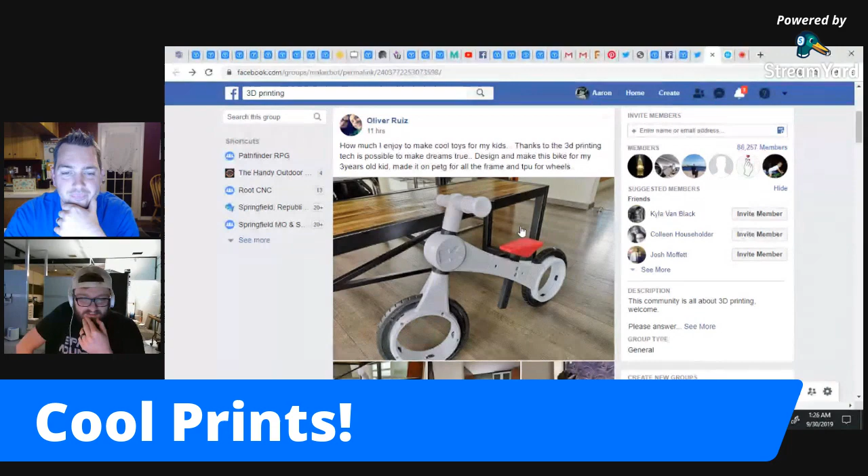Was this made on a desktop 3D printer? Well, here's all it says, but it doesn't say what. That's, and I only saved it because I saw that. I mean, it looks really cool. I just worry, like, are those joints in between the 3D printed pieces going to be strong enough?

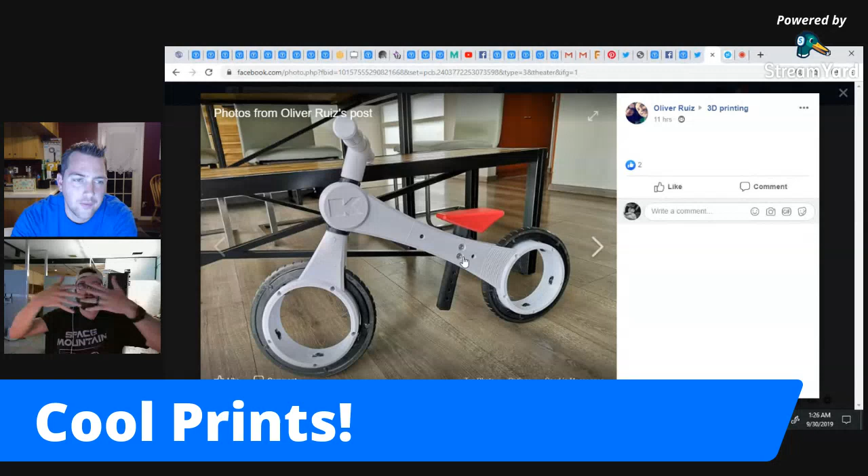Well, if you look at it, this could have been printed on probably a CR10 with the wheel size, is my guess. So this is probably one good sized piece going through. He's probably got this part going into here and bolted into it, which is what I would have done. I would have had it have that interlocking part on the sides, and then so you can bolt it, have it go through.

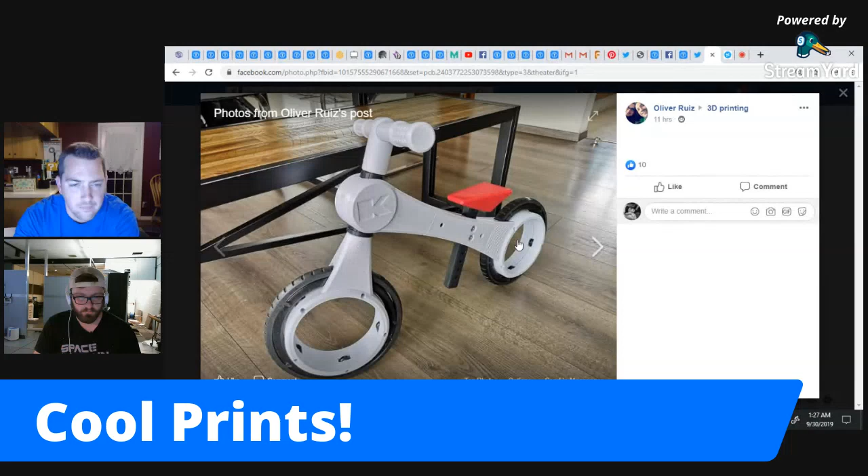I wonder, if I were to do it, I would probably run a threaded rod through the middle of it. Yeah, but the only problem is adjusting the seat part itself. Well, if you ran two threaded rods, one on either side... that's really cool though. Yeah, that's pretty cool. So I thought you'd like that.

Here's one more. So this goes into your robotics. Are you ready for it? 3D printed robotic cat.

I don't know if you know this about me, Aaron, but I hate cats. But you can change it to a dog.

But it's a 3D printed pet. Is it programmable? Does it do something interesting? I didn't have a whole lot of time to actually look at it because today was my son's birthday, so I didn't do a whole lot of looking at everything. But I think you're supposed to be able to program it.

So it's just kind of a robotics platform, but you just 3D print all the parts out. You use Arduinos and just get all the circuitry for it and kind of go at it.

Now I'm not sure if it's open source for everyone to use, like changing the program and everything, but it does say open source. So that's usually what that means.

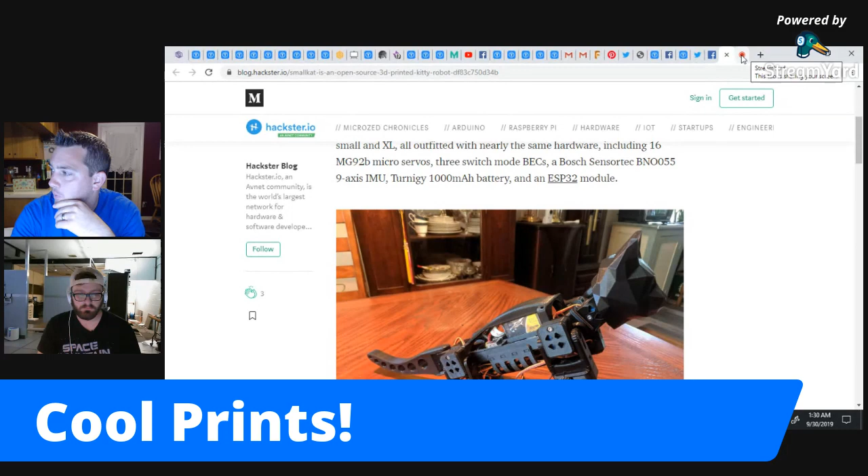Nice. Well, all right. That's cool. Oh, you undid that yourself. Okay, nice. Well, my turn, I guess.

So I just want to talk about some cool stuff that I've been printing over this last week. Some of you maybe spotted it in the background here. I actually made a lamp. I thought it was pretty cool. I printed it in pieces, in a green PETG that was actually donated to me.

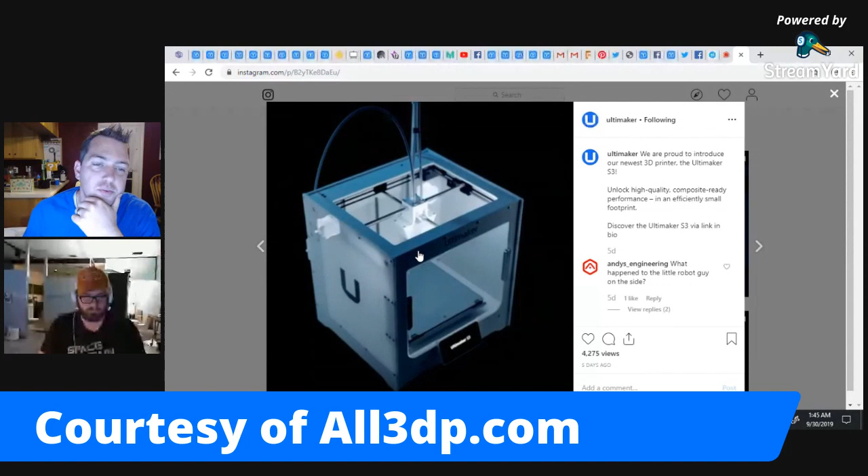So this is the new printer, the S3, the new one they're launching. They're just launching the S3, but they're also introducing attachments for the S5.

That first video you showed, it looked like all 6 filament spools were loaded up. Yeah, all 6 were completely loaded up. Are there rollers in there inside that cabinet? I want to say yes.

So yeah, that was our coming soon. Yeah, but I watched it and they talked about it actually, which was really cool.

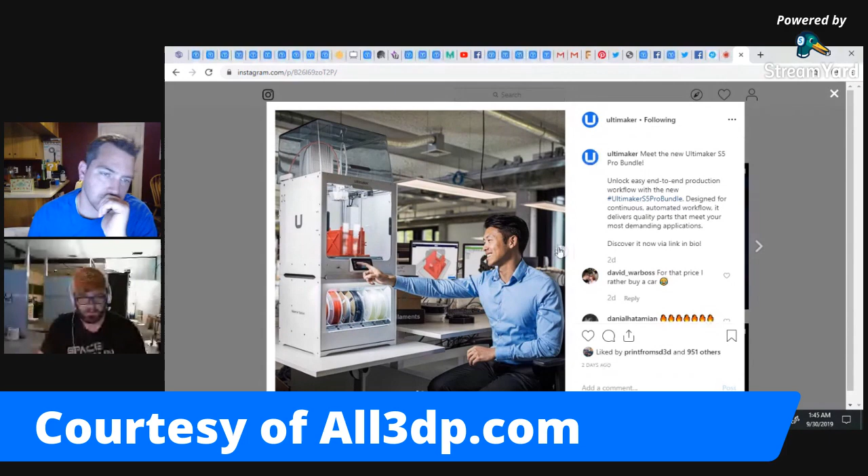So yeah, you got all 6 in here. They kind of feed in the front part right there. And let's go over it. I'll pause it on the spot.

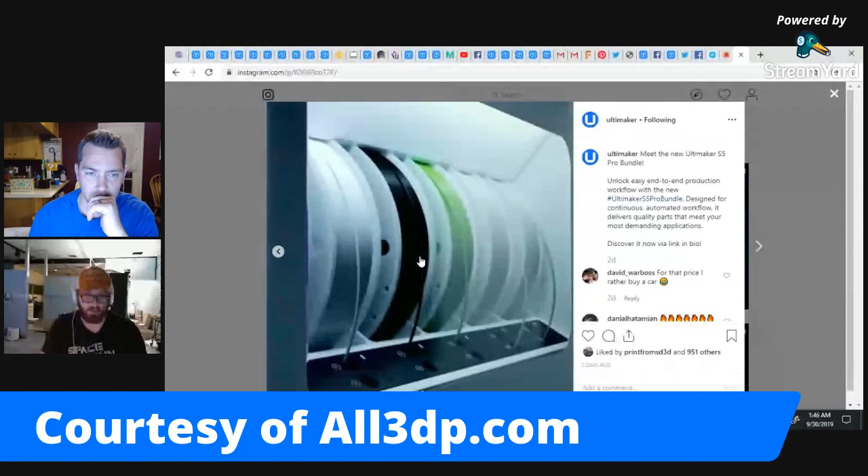Yeah, so it's your Pro bundle. See right there, it looks like they're all loaded up. Yeah, so they are all loaded up. And the interesting thing is, look, there's 2 spots for it to go in.

Yeah, so some are in the very front, but some are in the very back. Why? What's the difference? This is 1, 2. I was going to say that's 3 and 4 then.

So 10, you got 10 holes. I'm guessing it's numbered 1 through 10. But why? Are they gonna have... are you gonna be able to load 10?

Or does this look like it's a rendered visual thing? Like it's not real. This is pretty much just rendered, yeah.

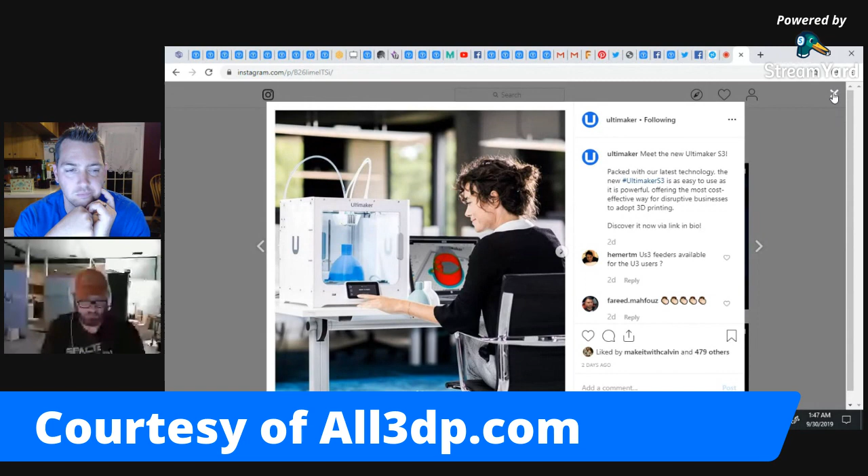But it should feed it in and up and out. So if it's doing what they say it should do, it'll take it and just feed it back into your nozzles through your Bowden system. That's pretty cool, man.

I mean, it's nice, it's way out of my price range, but it's real nice. Yeah, me too. So that was the first one that I kind of saw. I really thought that was pretty cool. And then let's see what else.

There's some new materials coming out. This company, 3D Systems, makes 3D printed materials, and they claim they have similar characteristics to injection molded plastics.

So getting injection molded piece characteristics essentially out of FDM 3D printers. That's kind of cool.

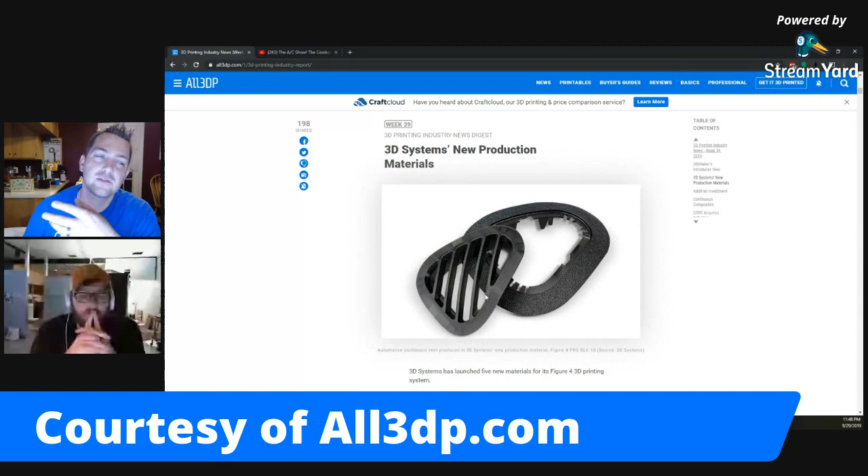They print at a decent temperature, like 300 C. So you can't have your basic desktop printer print this, but 300 C is a lot less than others like PEEK and stuff that print at like 500.

So Cozmic Dumpster asked, what computer to use for streaming? His computer is fine, but when he tries to stream, it sucks.

Yeah, so I use an old laptop, mine's 7, 8 years old. Being used on your bandwidth is one thing, so if people are watching constant videos or something's being downloaded or uploaded, that will hinder your quality.

Also your output of your video. So if you're going to be streaming something, don't do it at 1080 or 4K, do it at like 720. That's a big thing that's going to help you out right there.

Yeah, that's good, and I actually have a pretty decent computer, I custom built a PC, but honestly, one of the really cool things is having a decent webcam, but then also using StreamYard.

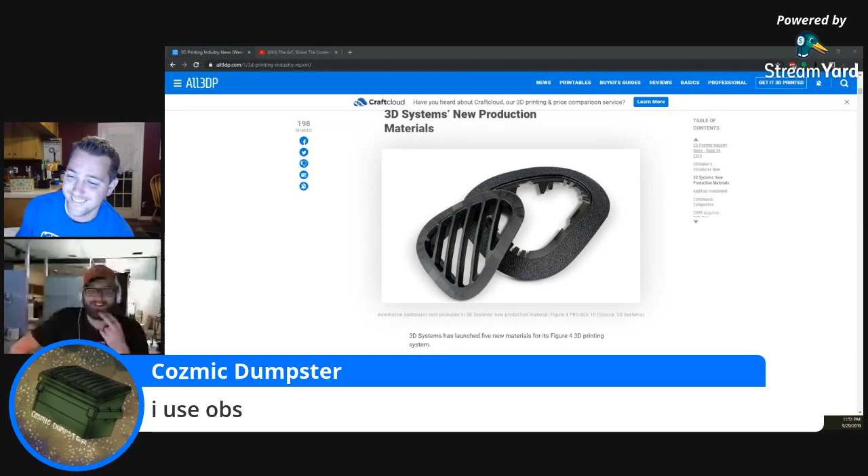It might almost be better if we downgraded the quality. Mine might be going grainy because I selected 720 on mine - I was just like, oh sure, 720. I think it's always set at 480 by default. So yeah, you don't go higher than 720 if you're live streaming - just keep it low quality.

Your webcam helps too. My webcam is a pretty good one - I actually got it on sale for $15 on Amazon, originally a $50 webcam. You can get good deals. $50 is actually a decent price for this cam, just for the audio quality it puts out and its video quality. The one thing I like about it is it does not autofocus - I hate autofocus cameras. So when I do this, it's not going to focus; I have to manually twist it. My camera autofocuses and I love it, but that's one thing I like about mine.

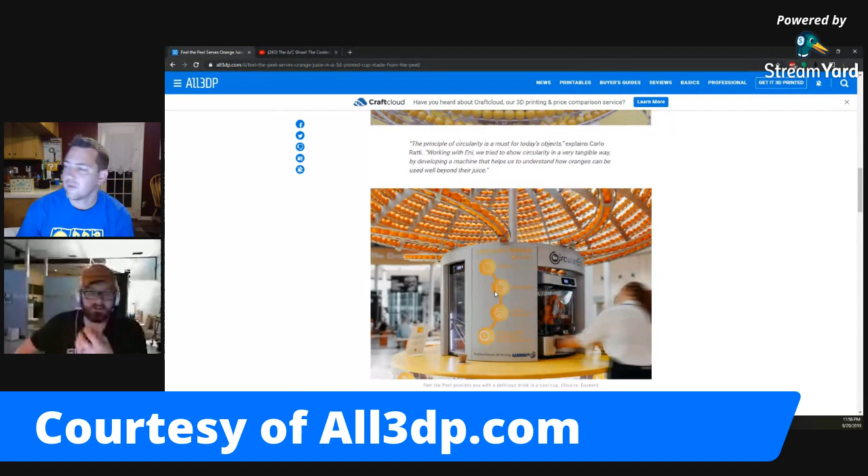If you form it, you put it into pulp, then compress it into a mold form, dry it out like that, and it should stay fine.

So nothing to truly use like an adhesive glue for it. That's what I'm trying to get to.

It says that it's a bioplastic that they make out of the rind, and it has a 3D printer in the center of the machine where when you order your orange juice, you watch the cup be made right in front of your eyes.

I wonder how long that takes. It says half an hour to print the cup. I can see that, the cup's got to be like 50, 70 millimeters tall from the picture.

But they're worried about the material they use, the process isn't considered food safe because 3D printers really aren't considered to make food grade materials.

But it's a cool idea. There's a picture of what it looks like. That's kind of cool, pretty sweet looking. At least if anything, it's beautiful. Oh yeah, it looks cool.

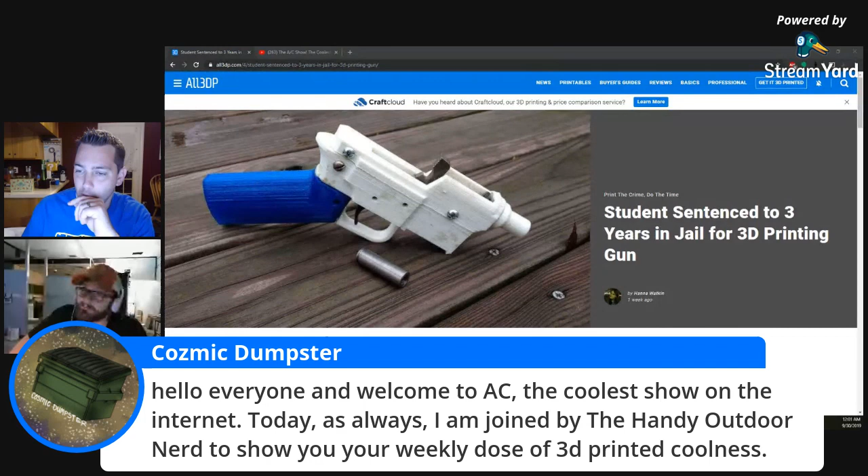So, as we're talking about 3D printed guns, right? Yeah. It's a good thing we're not monetized. Yeah, I don't care, honestly. Like, at this point, I feel like I'm never going to get monetized, so I really just could not care less anymore. Well, and I'm not even close to being up to where I need to be monetized.

Yeah, and I don't care about paying anything really. I mean, if I get 1,000 plus subscribers, I'm okay with that. But I'll work my way up, slowly.

It happens. I don't know how often you go shooting, Aaron, how avid you are. But I own a few guns and I like going shooting, all the time. It's one of my favorite things to do. One of my favorite videos I ever made was about this - I didn't really explain anything, it was just fun to make - but I talked about Newton's first law of motion and how basically we could create bulletproof objects out of stuff you find at the dollar store.

Uh-oh, Aaron is dropping out of the stream for a second, guys. Hopefully he comes back soon. There you go, okay, yeah, we're back. It said problems, and everything was loading, I was like, let's hit refresh.

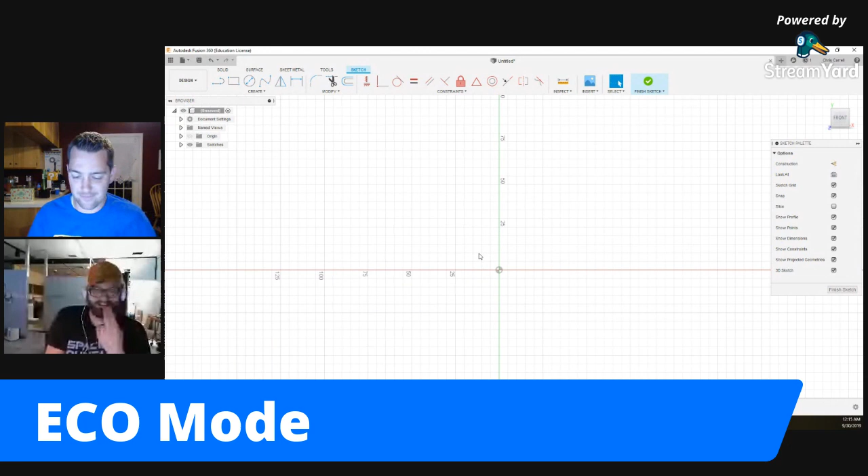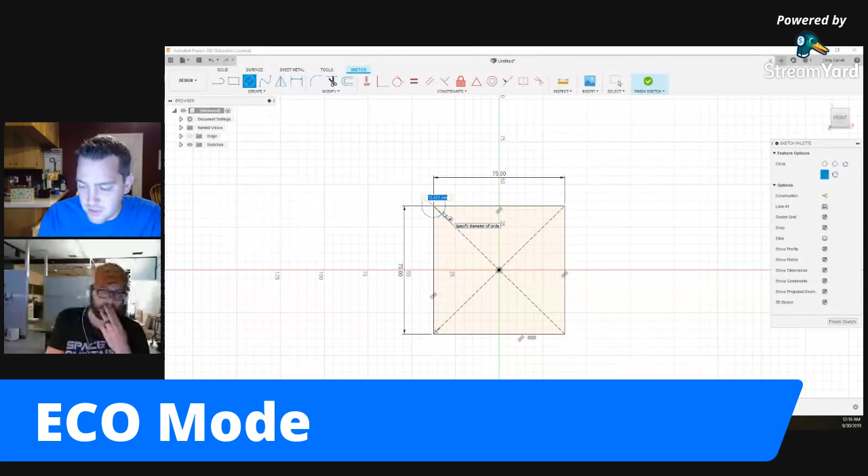Okay, so what I'm going to do is go ahead and create a sketch. Because for some reason you can never get the sketch to go on the right plane, I'm just going to pick a random one. I'm going to draw a rectangle, but a center rectangle, because I want to put it right here in the center. I'm going to start out 75 by 75, so a 75 by 75 rectangle. The corners of the rectangle are where the hole circles would be. So I'm going to go ahead and draw some circles. I measured my holes, they're less than 5 millimeters in the back of my monitor, so I'm going to make these circles 5 millimeters.

I'm not going to do anything. I'm only going to draw one circle, because I want to show off a little trick in just a minute. And then I'm going to make the bracket.

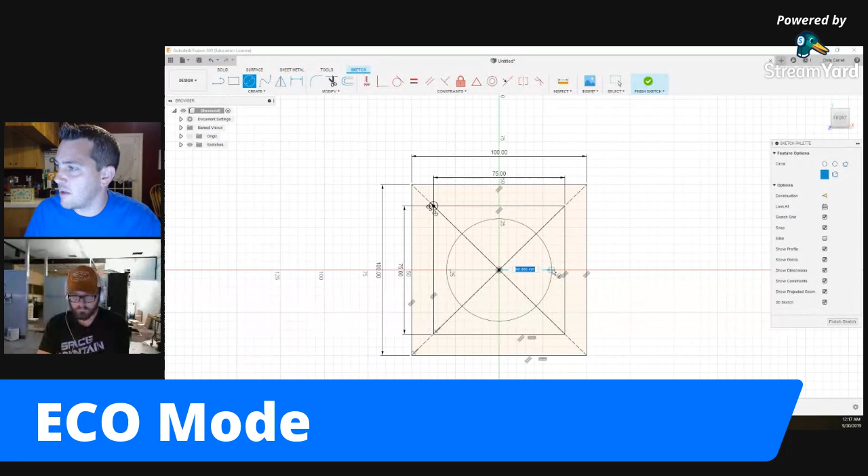So I'm going to do another center rectangle right here in the middle, and I'm going to make the bracket. I think it was 100 by 100, so that's going to be the size of the bracket with the holes in it. I think I'm actually going to put a big circle in the middle because I hate that I'm going to 3D print all this extra plastic I don't need, so I'm going to put a 60 millimeter hole in it.

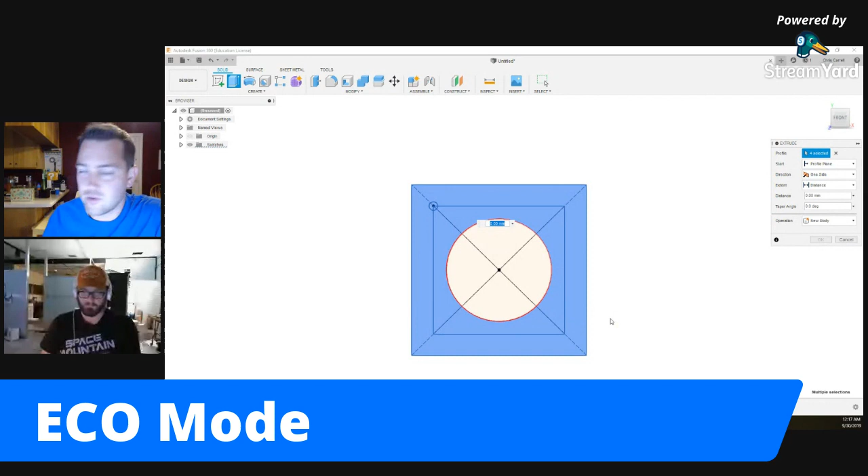Now what I'm going to do is take this and extrude these pieces. I'm going to extrude this too because I want to show you a little trick - well, you probably already know it, but I'll show the people watching. I'm going to extrude this and make it 5 millimeters tall, then turn the sketch back on so I can see my circles and stuff.

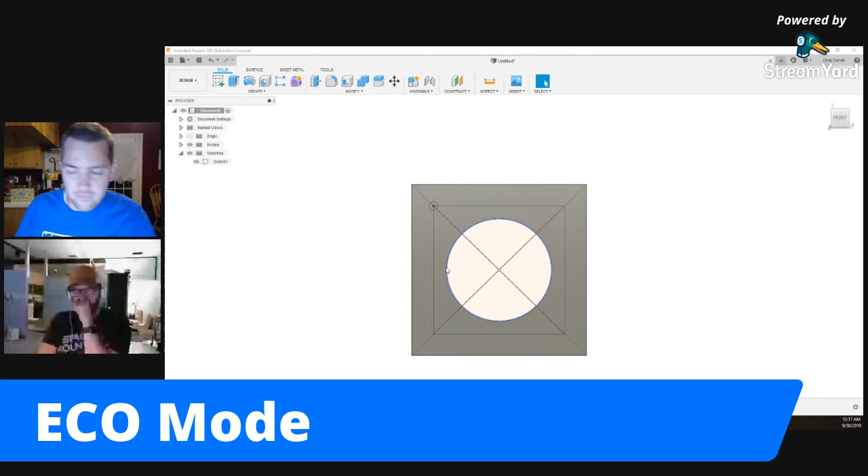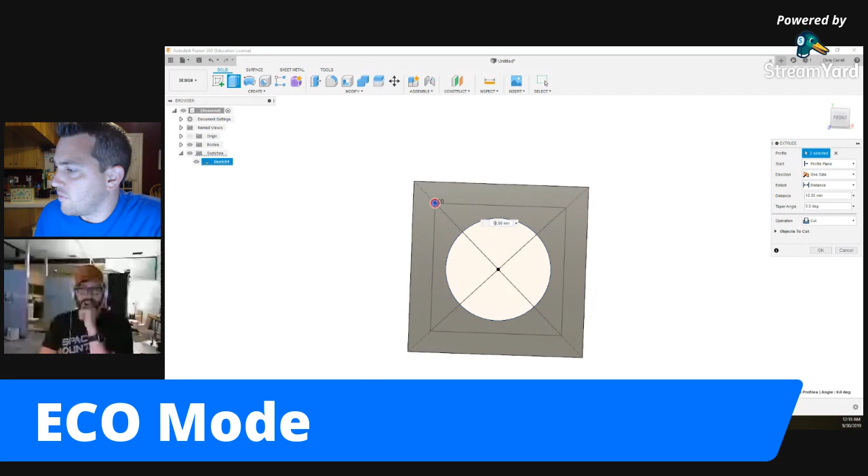So here's my little trick. I'm going to push E for extrude, and I'm going to select this circle that I made before. And I'm going to extrude it 10, and what it's going to do - hopefully, if I can do this right - is cut a hole into the print.

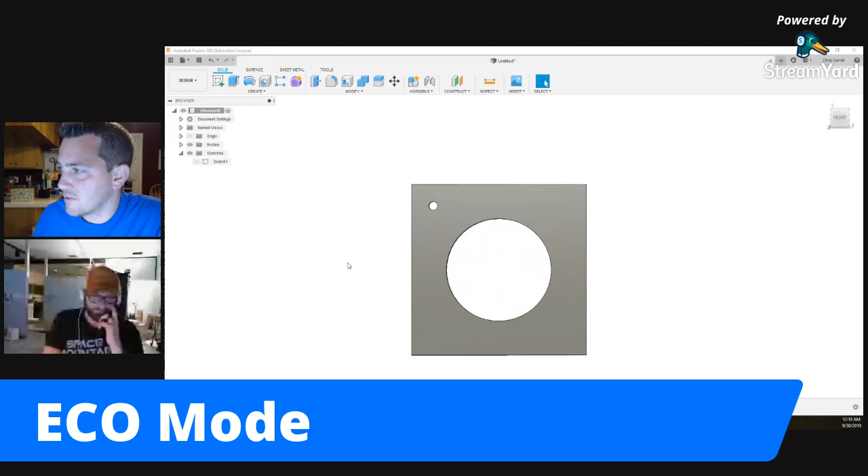And the reason I wanted to do it that way is because I want to make a pattern out of this. So what I'm going to do is make a circular pattern. I know that this is in the right spot, so I'm going to go to create pattern, and I'm going to create a circular pattern.

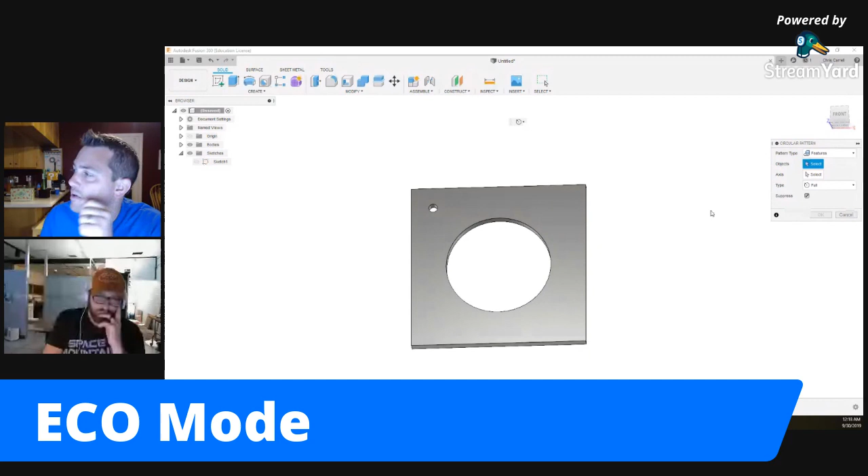When I create that circular pattern, I'm going to choose 'features' as my pattern type - in other words, like little things you do, like punching a hole out, is going to be the feature I want to select. So I'm going to select that feature, which is where I punch that hole.

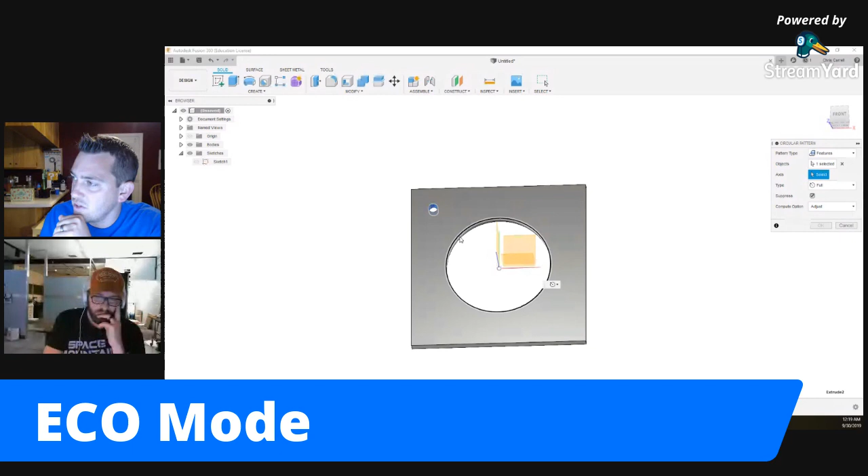Then I'm going to select what axis I want it rotated around. If I just click on one of these circles, it automatically generates that - you can do the circle, or you can do the z-axis in the middle, the blue one here. I need to have 4 of them, and when I push 4, it automatically creates all 4 holes perfectly spaced exactly where I need them to be.

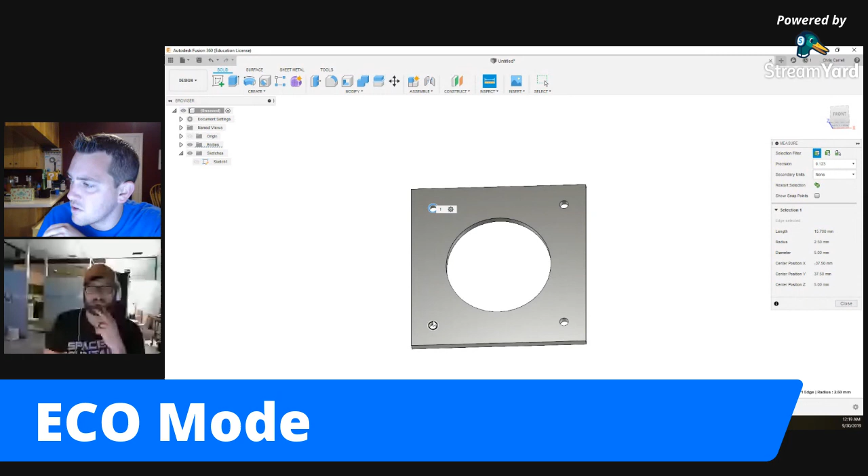And if I go and inspect them, I can select this circle, and it tells me it's exactly - I don't know if you can see that - 75 millimeters from center to center, which is exactly what I wanted.

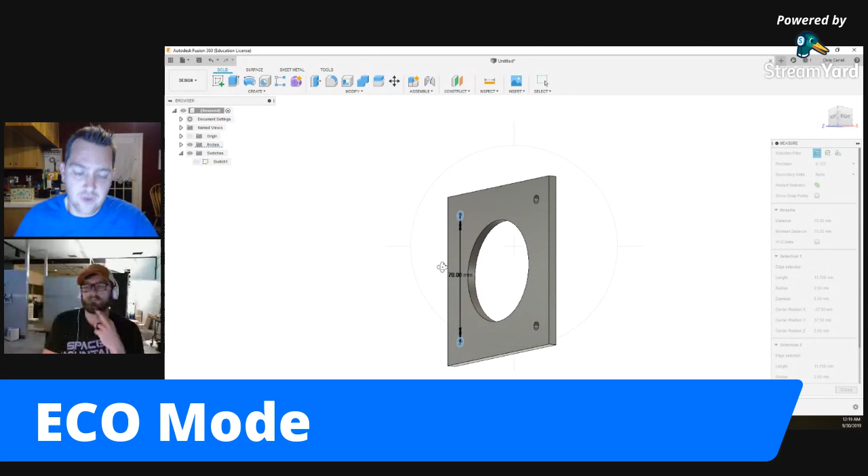So that's pretty cool. Now what I'm going to do is create a little thing called a French cleat - basically I'm going to draw in a little extra spiky piece over here.

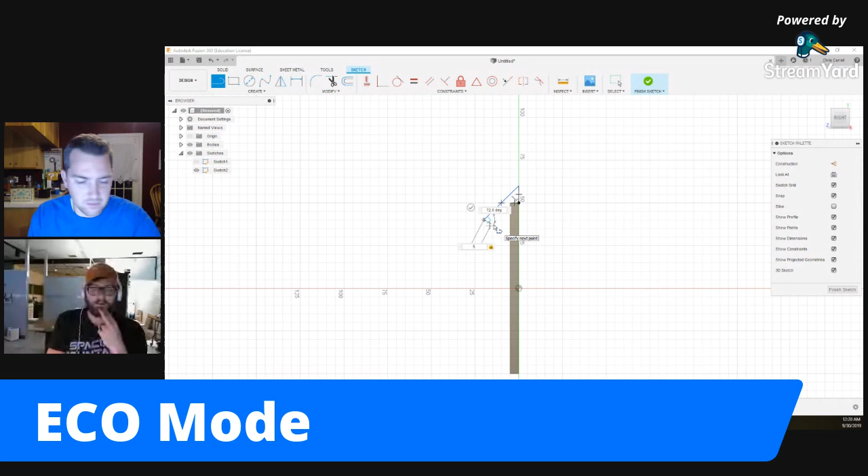About like that, and then I'm going to go, let's see, 5. You're pretty much doing a French cleat - it's going to be a French cleat, yeah. So, pull my woodworking out of my hat.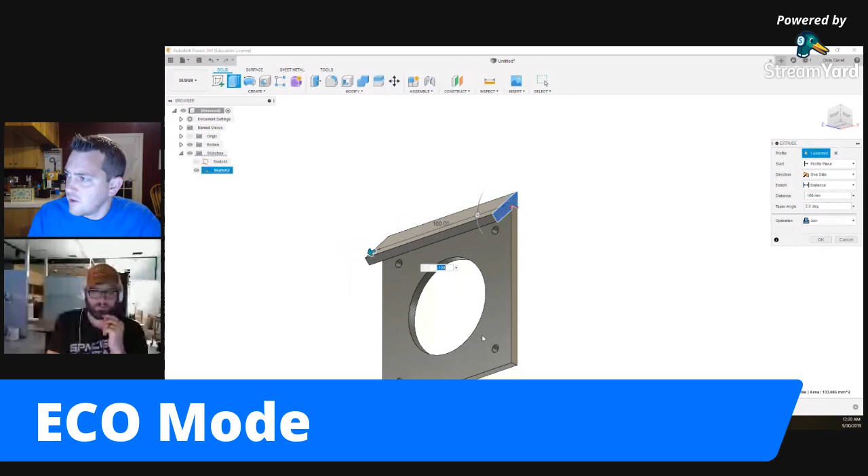So then I'm going to take this and extrude it. I think I need to go maybe 100 to make it connect, if I'm right. Okay, so now what I've done is put a little hook on the end.

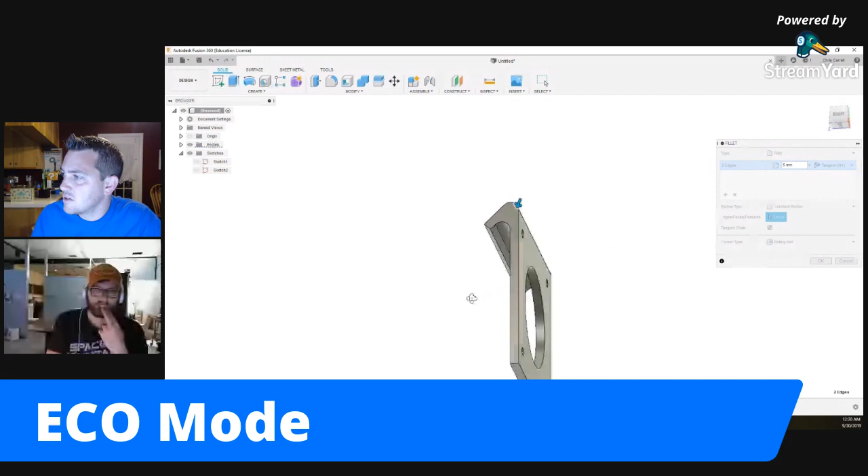And I'm going to push F for fillet, and click on some of these sharp pointy edges, and add a little radius to it. That's going to round off the edges to make it not so sharp, and it's also going to add some strength to this joint.

Chris, you're going to want to go back to those top 2 holes right there, and extrude them all the way out the back so you can actually use them to tighten the screws in. Right, yeah, so actually what I'm thinking about doing is...

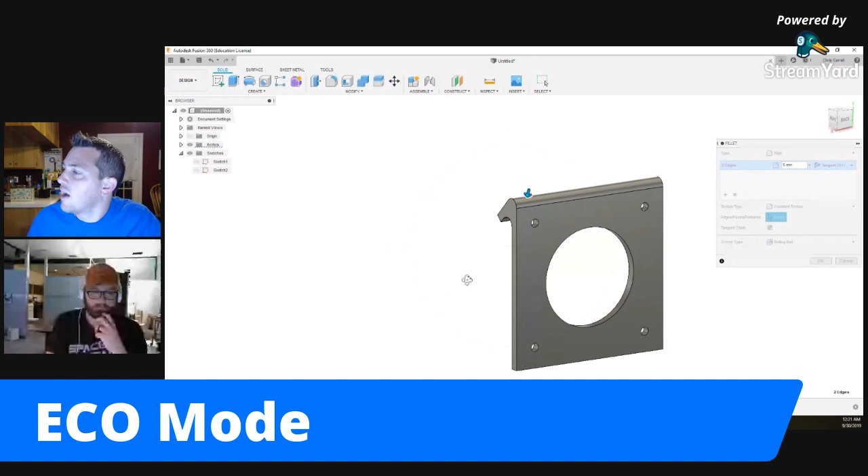I think I can click E for extrude. No, I can't, because I don't have anything drawn there. So let's see what I can do here.

I did this the other day, and it worked out perfectly. It really did. So what I'll do then is...

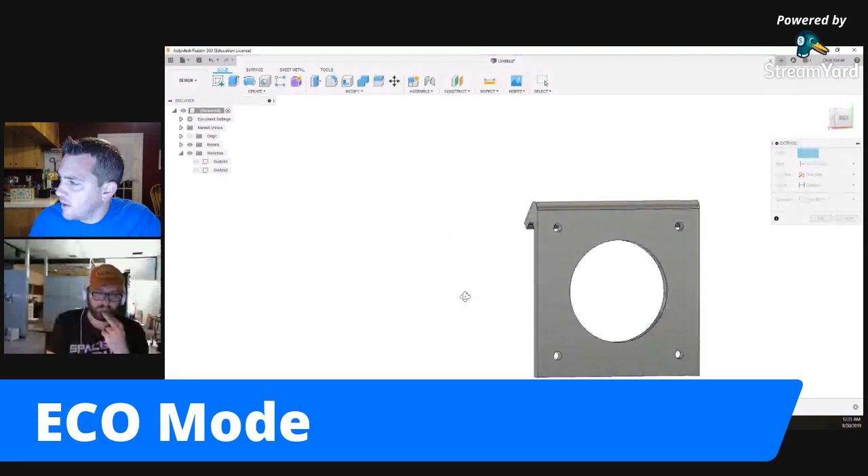Geez, how do I do this, man? You got sketch turned on for those? Yeah, go ahead and turn your sketch on, circle it. Can I just extrude it? Yeah, just do that. I only have one circle drawn now. I guess I can draw the other circles. I was trying to be fancy.

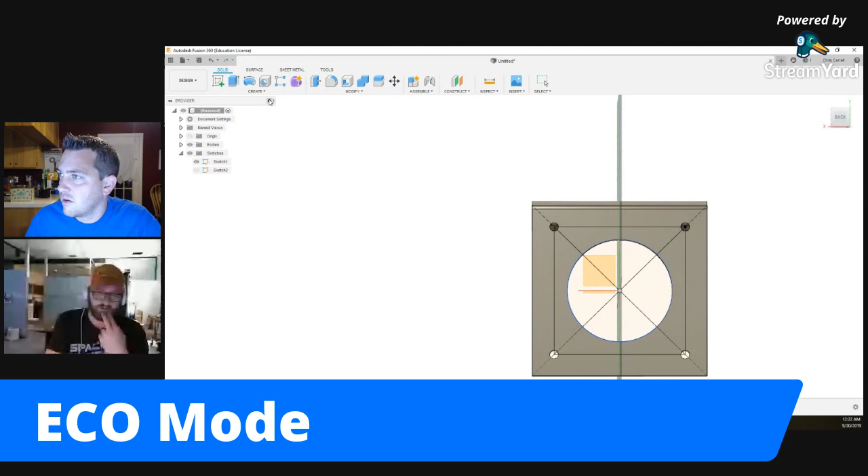Well, you only need the one circle, those two circles up top. You don't need any more than the two. Yeah.

Well, just draw these in here. I'm so lazy when it comes to this. I try to be cool, but really I'm just terrible at it.

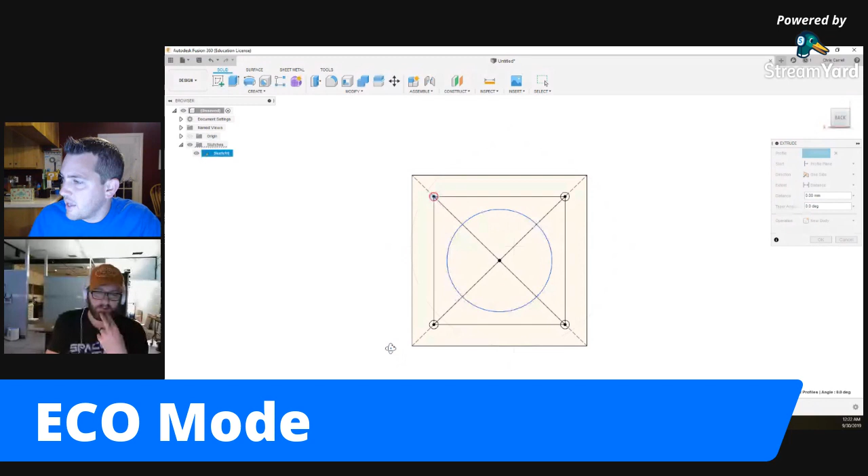Okay, so just go through. Is it these ones? I can't remember. Top two, upper two. It's these two, yeah? Yep.

So I select all those pieces, and I'm going to just extrude. I'm just going to say like 30 because why not. And this is going to be a cut.

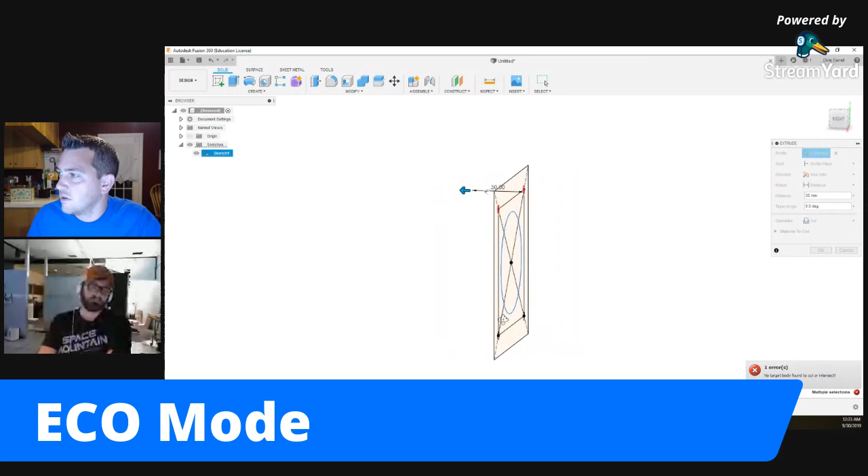Oh, there's nothing to cut, because for some reason when you're in the sketch, hold on. So what you're doing, your sketch is before the actual extrusion. That's why you can't cut.

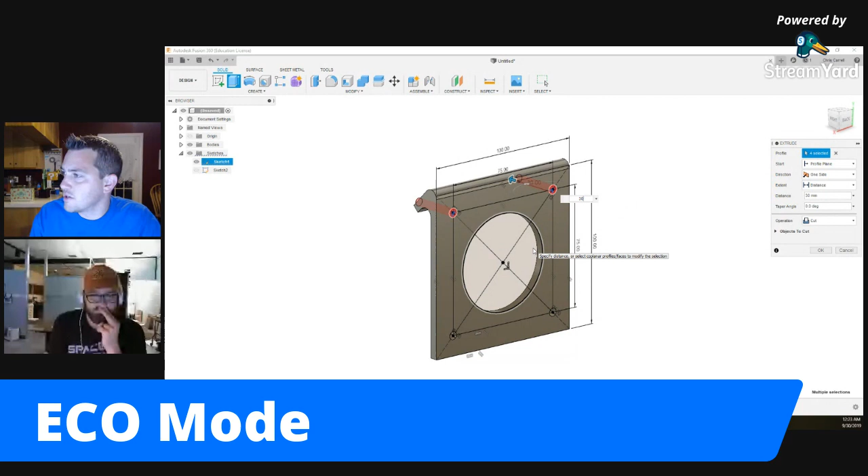So I just have to finish the sketch, and then now I can do it. I click on my circles here, and I'm going to extrude it like 30 just to make sure I get all the way through. There. So now all that does is cut some little grooves so I can get the screw into the hole. And that should be just fine right there. Yep, so there's that part.

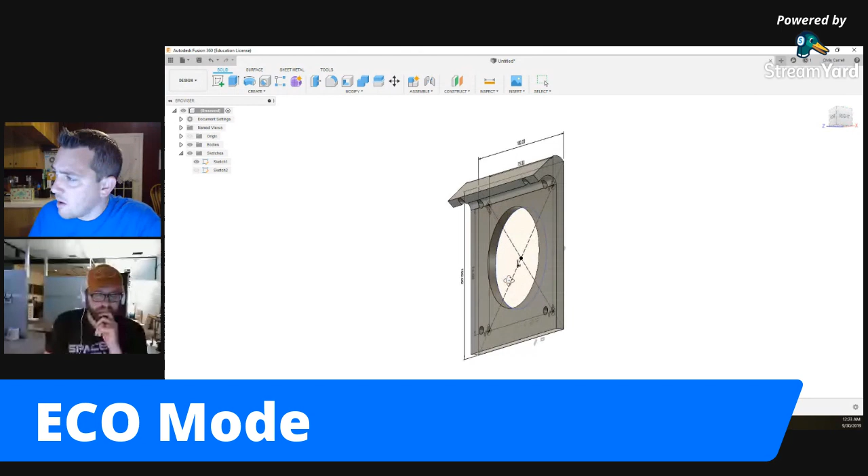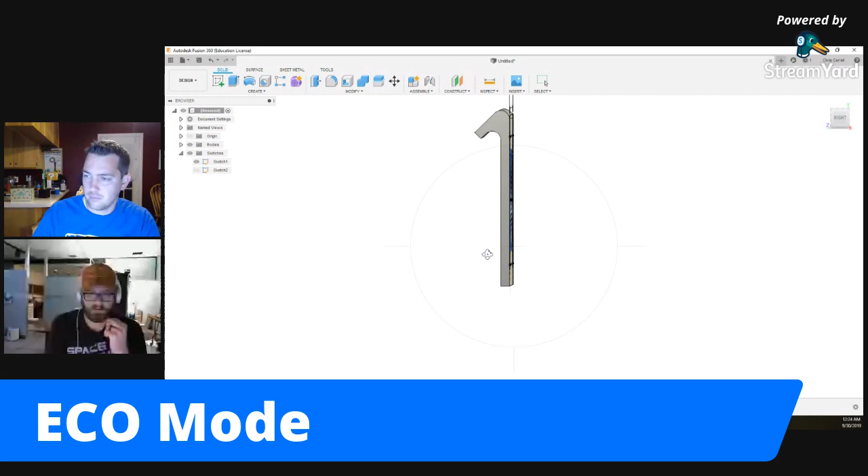Now the next part is to create a little bracket that I can screw to the wall. What I would do is go to the side view of that and click, yep, go ahead and click your square to get right onto it. Your square, up your box in the corner. Just go click on that face.

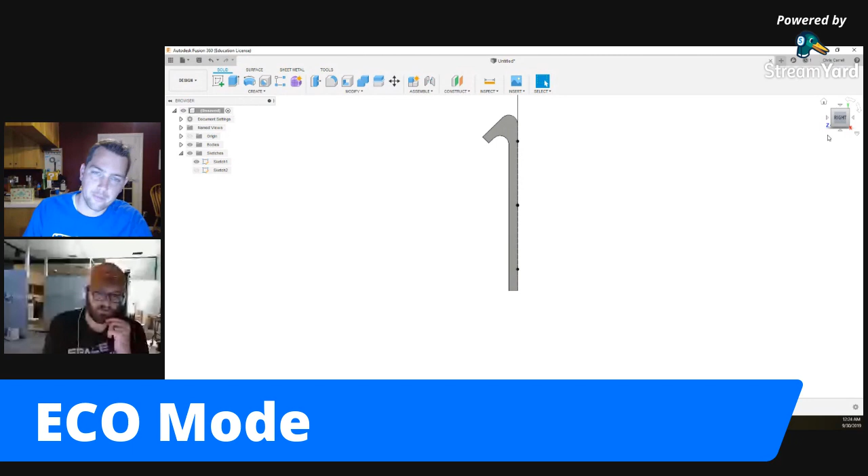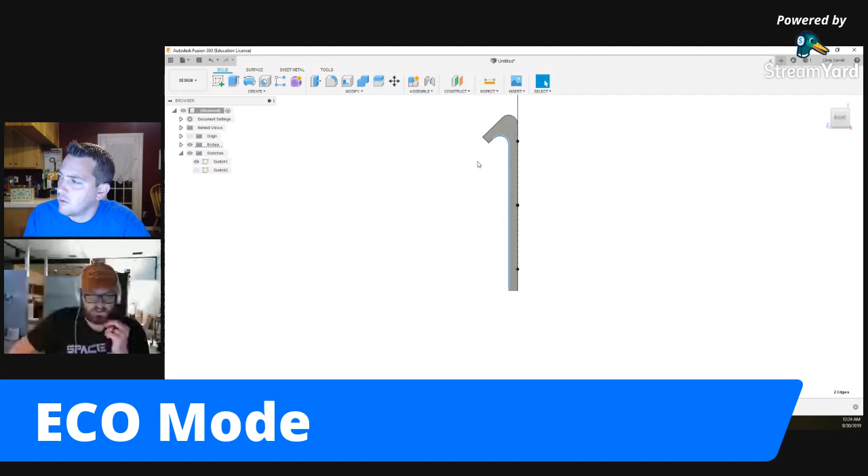This right here you're talking about? Yep. Yeah, so if you click on the edge of the curved part on that side, down the inside part where you're going to, right there. Click that and hold shift down, and select that part there, and make sure you got all of that arc selected. So once you've got that selected, hit O.

I have no idea what we're doing here. This doesn't make sense to me. I'm trying to read what you've got up there on your screen.

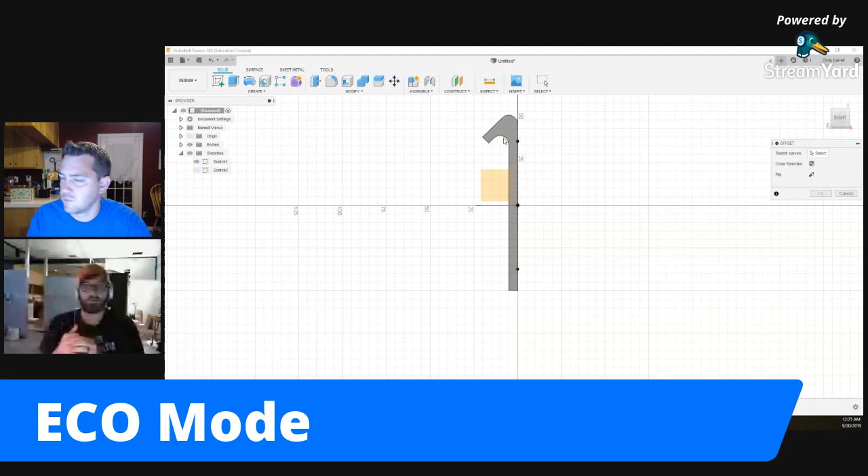So if you do it right, you can hit O for offset, and then you can just create your part that way you need. You just extrude it back to the other side, and you keep that offset so it's not going to mess with the actual part. You'll have a nice size difference that you want.

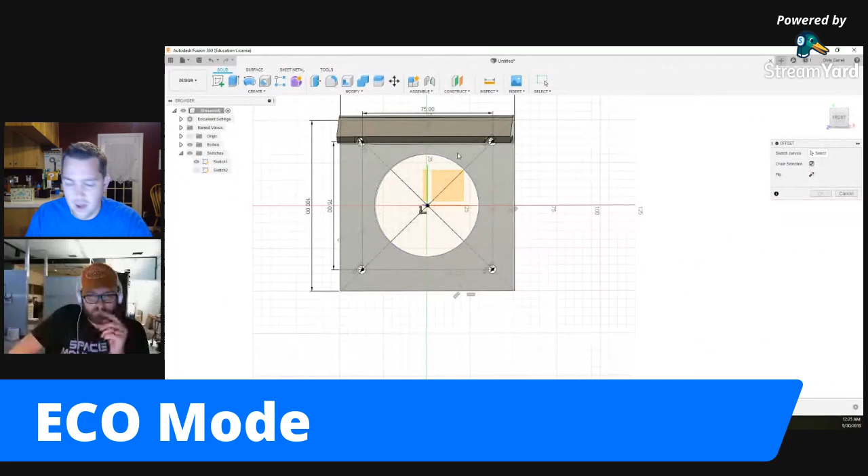Well, here's what I'm going to do. I'm going to turn off these sketches because it confuses me. And let's go, there we go. I'm going to go back a step here. Get out of here, get out of here.

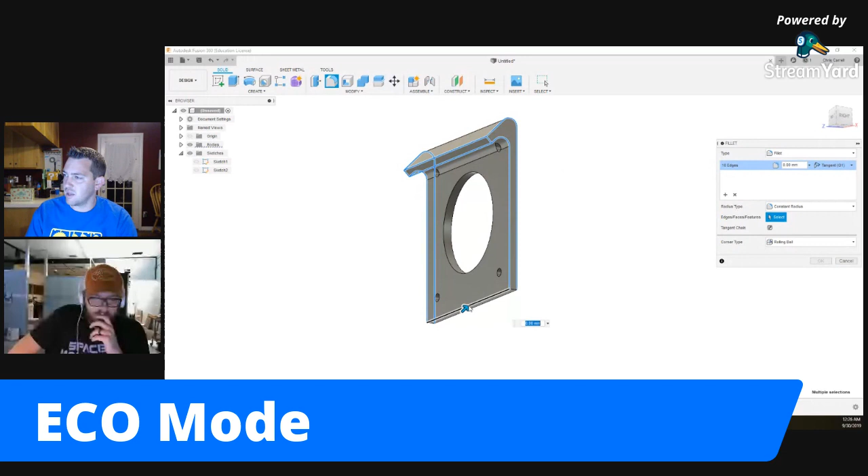I'm going to go back a step, and I am going to add some fillets. I got this figured out. I'm going to add a few fillets. First of all, I add fillets because it makes the print a lot smoother and a lot easier to get off the build plate. But what that's also going to do is give me a rounded edge to clip into the bracket.

I think I can do that. Yeah, there we go. So that's going to give me a much smoother edge, and I think that's going to be okay.

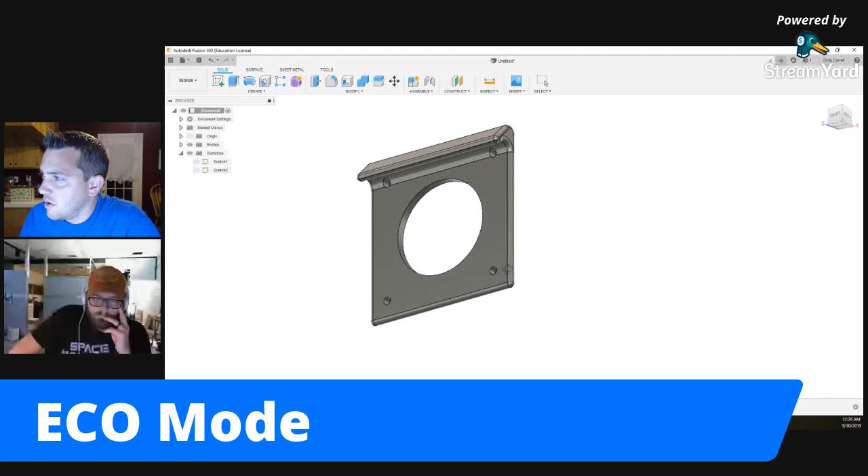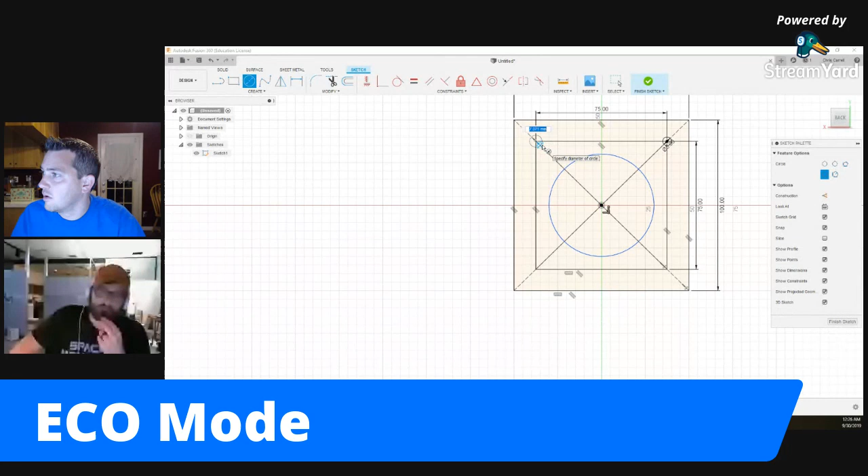So now I go back into my sketch. Come on now. Now I will draw that circle back in. Finish sketch, show the sketch. E for extrude.

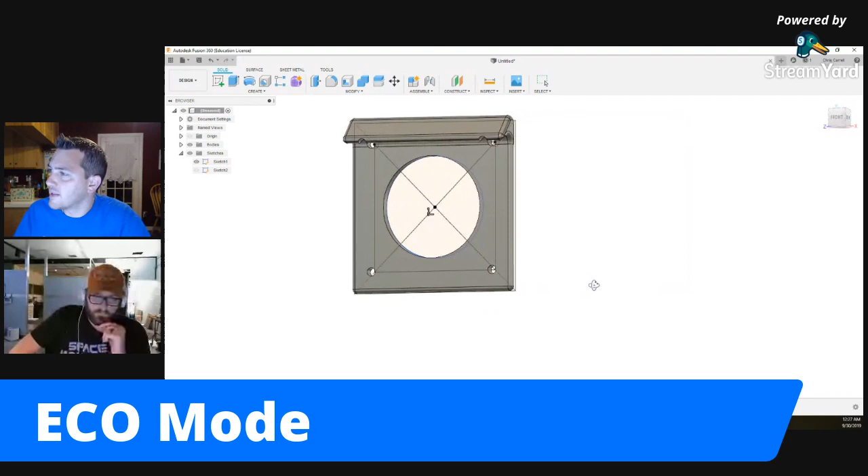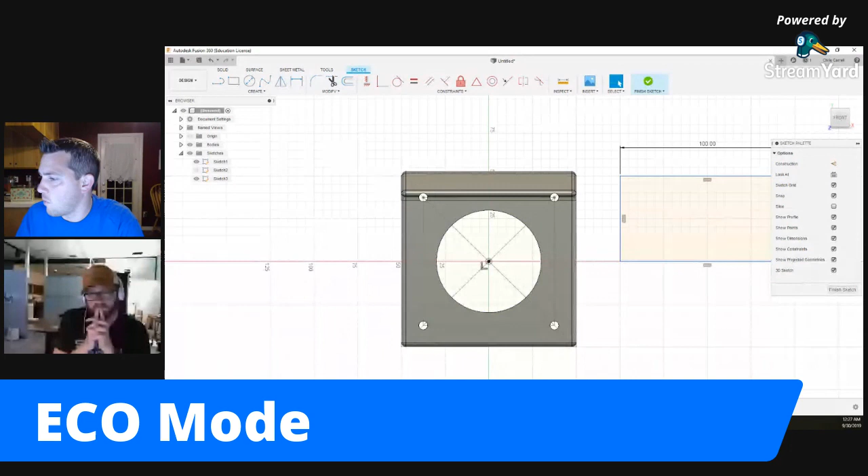And then punch that. Okay, there, that's a little bit better actually. So now what I'm going to do is create this part by doing a side view. I'm going to create a new sketch. That's easiest for me since I suck at this. I want to do a side view, this will work. I'm going to create a rectangle, I want it to be that big. Come on now. Move, there we go.

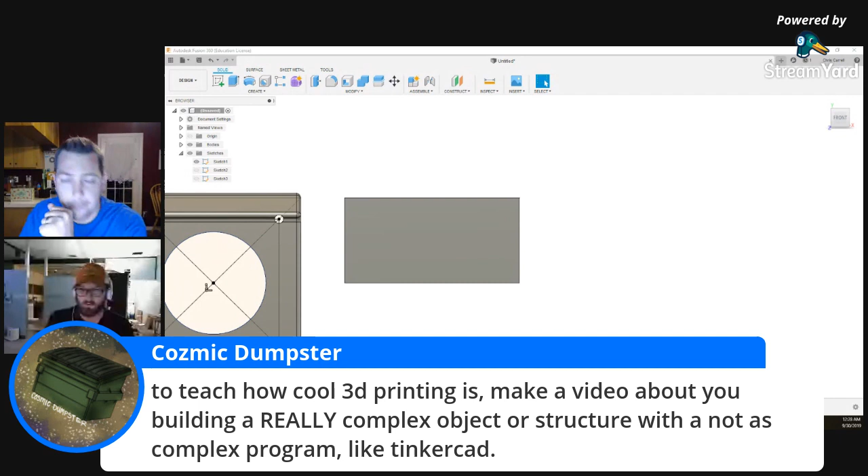So Cozmic Dumpster had said, to teach how cool 3D printing is, make a video about building a really complex object or structure with a not as complex program like Tinkercad. I would love to do that if I was better at Tinkercad. Yeah, I kind of suck at Tinkercad. I can do Tinkercad, I'll get better at it. I mean, I know I will.

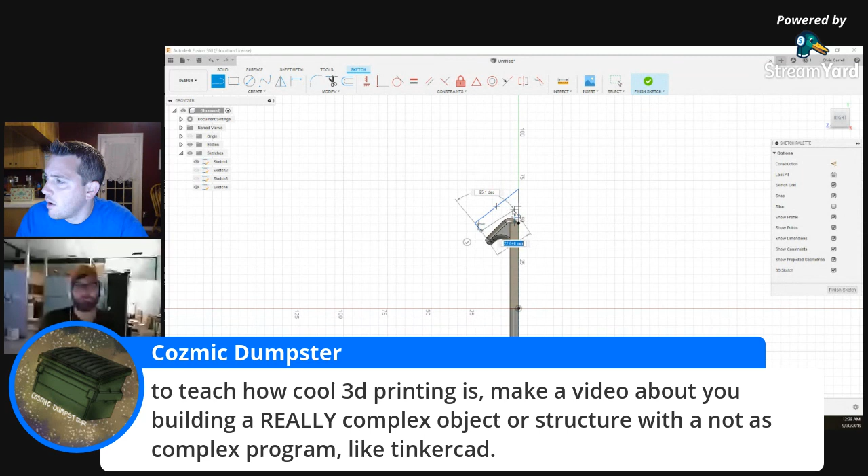Well, if you were listening earlier, Cozmic Dumpster, I don't know when you came on, the reason it's called Eco Mode is because we're trying to figure out a name for this type of segment. So right now we don't have an actual set name for it, because it's the AC show, the coolest show on YouTube. We're trying to keep with the lingo of Ace the air conditioner. So that's why it's called Eco Mode right now.

See, this is how I roll, man. Just do it manually, because I'm terrible. But it's gonna be all right, it's gonna work, it's going to work out. There we go. Ooh, it's like, hey, by the way, you forgot one. Something's wrong here. Not sure what it is, but something's wrong.

Those, let me do it. Well, I can do it too. So there we go, problem solved, I guess.

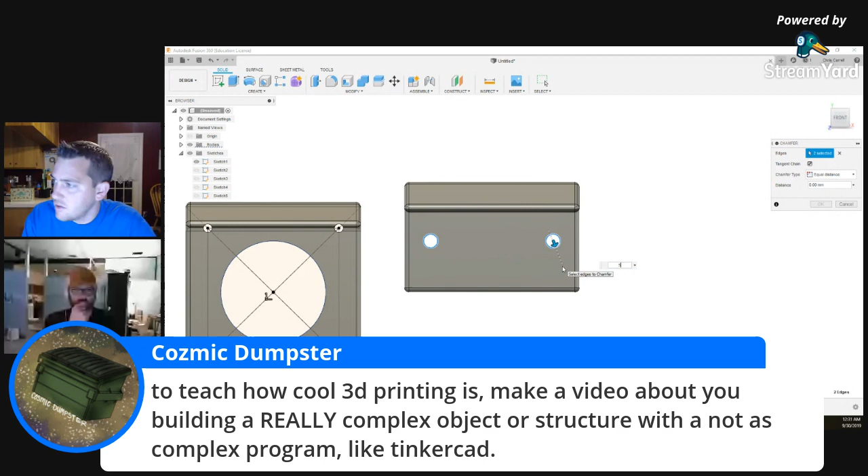Okay, so now what I'm going to do is, I don't care where the screw holes go in this piece, so I'm just going to do a couple of screw holes in about the same spot just to make them symmetrical. The reason why I don't care is because this is going to be screwed into a piece of wood. So there we go, cut them out. And then I will even go to modify, chamfer, and put a chamfered edge on there for the screws to help hide them a little bit.

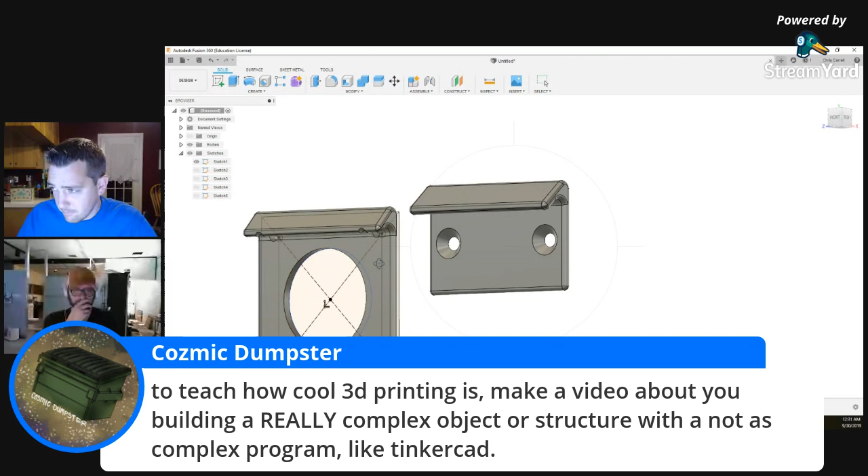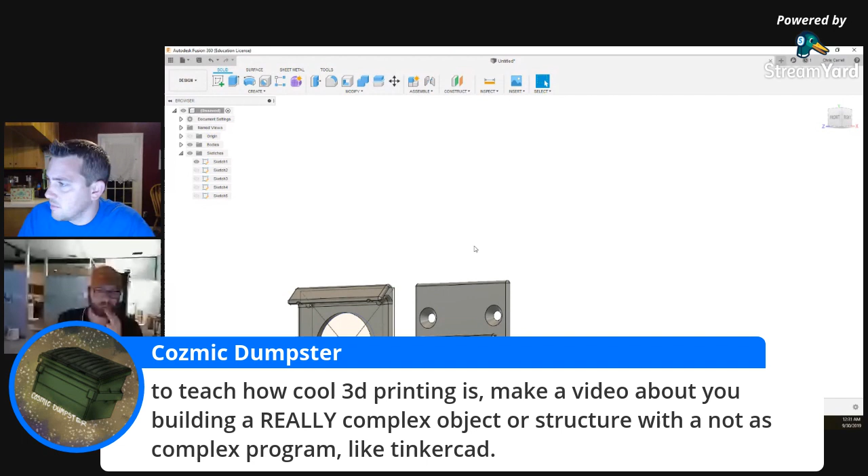So now I should be able, in theory, to screw this to the wall, to my board that's going to be on the wall, and then I can screw this to my monitor, and my monitor will hang from this piece if I just... let's see, I'm going to... there we go. All right, now it kind of looks a little bit more like I want it to. Yeah. Nice. Yeah, so I'll just screw this to the wall, and then I'll screw this to my monitor, and then I should be able to just hang my monitor from that bracket, maybe? There you go. Possibly, possibly.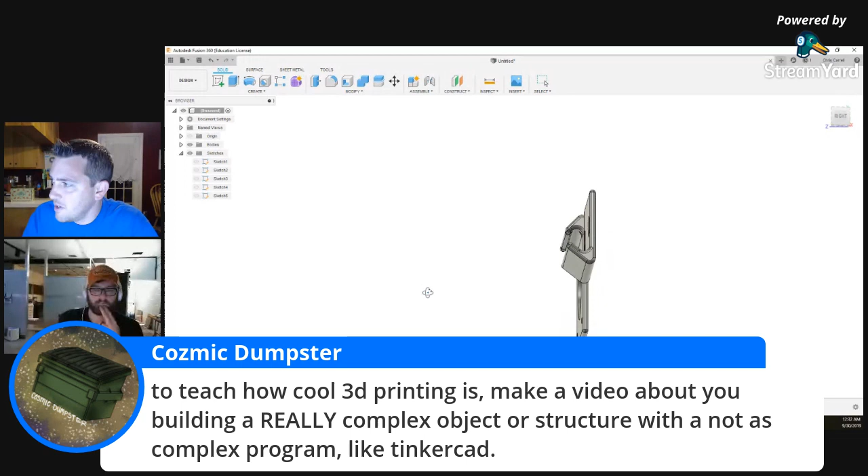Anyways, so that took a lot longer than it should have. It happens. At least it wasn't the maker coin time. Yeah, well, at least it wasn't like being timed.

Man, I need a new banner. I gotta make a new banner. You gonna call it Bruce? Yeah.

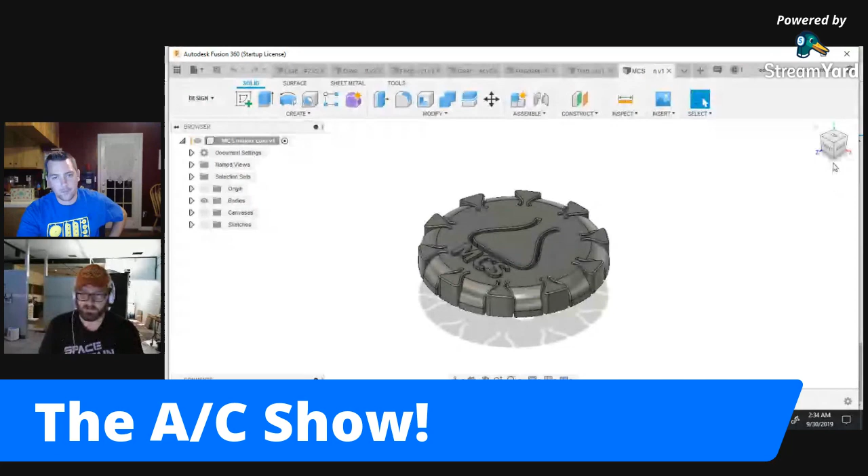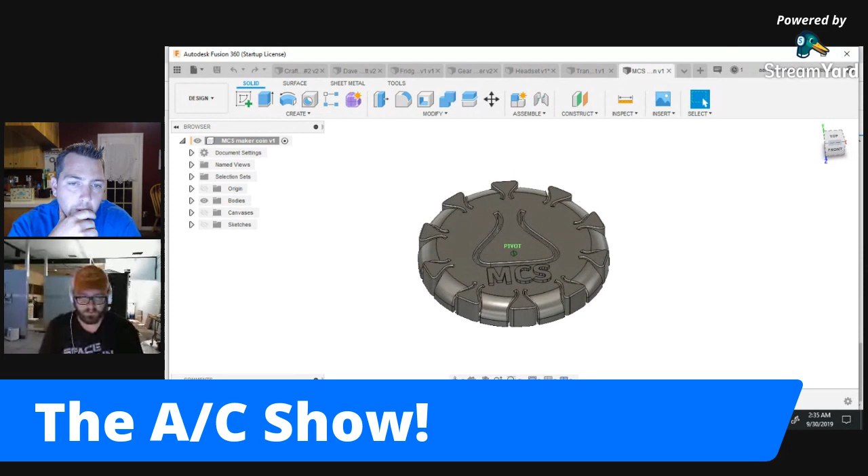All right, let me share my screen. This is the finished product of the maker coin. I added some fillets all around here to bring this down, and some up here and around here to make it nice and smooth, blend in and not be so sharp on the edges, other than the underside, which you could obviously add fillets to too, but that's how I wanted it to turn out.

So you've got MCS for Mr. Carrell Science, but then if you rotate all the way around, you get Mr. Carrell Science.

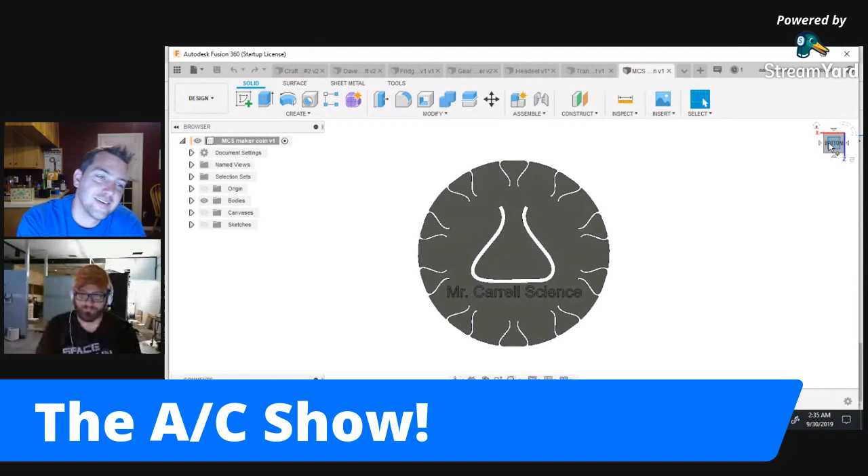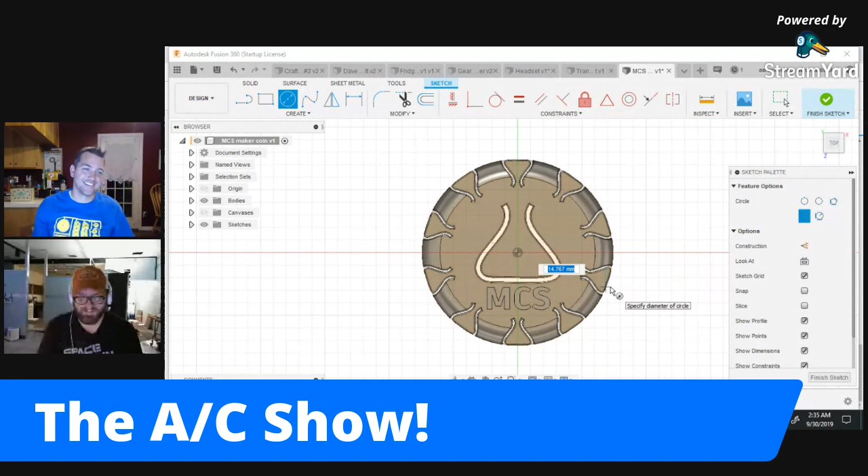How big is that? If we go up to the top, you can scale it up to whatever size. But going by the circle, I wasn't paying attention to the actual scaling of the object. It's about 15 millimeters. So you'll want to scale it up anyway. I wasn't going off the actual size, just going 'this is the size I need to make it match this' — I was winging it. So yeah, make it up to like 23, 25 millimeters around there, that's probably what you want to do.

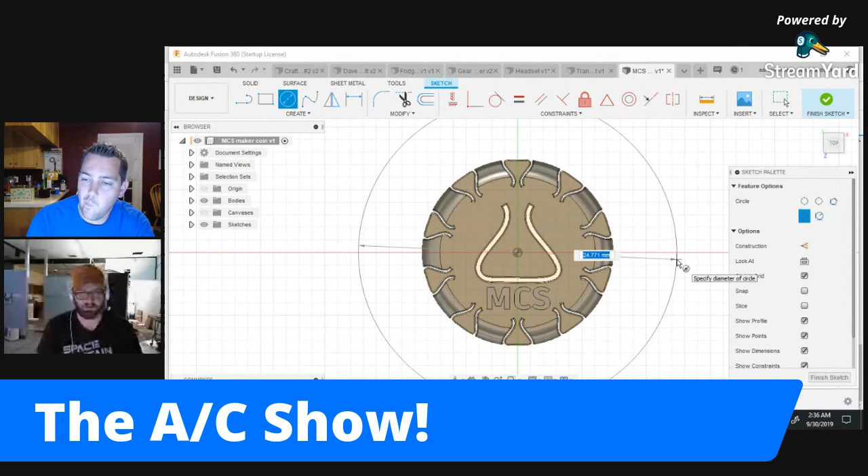But that's how it is, and the Mr. Carrell Science is countersunk up into it.

I'm going to see if I can fix my printer real quick. The printer I have here at home has got some struggles right now, but I think I might be able to fix it real quick, and I might try to start that print up before I go to bed, just to see how it does.